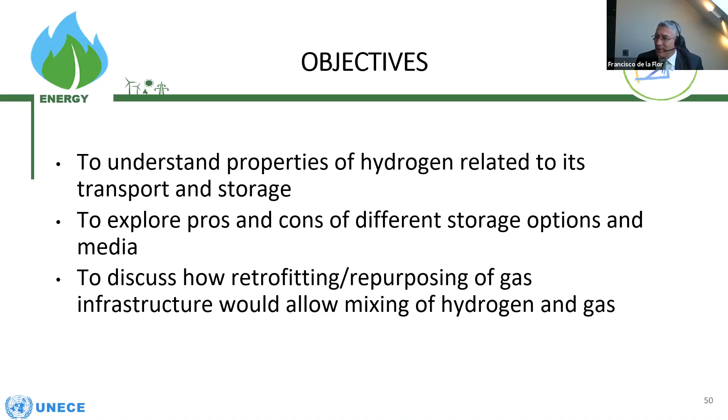I cannot resist saying, regarding one of the statements made by the Deputy Executive Secretary in his opening, that hydrogen shouldn't be seen as a liability. It's not hazardous material, but it's an asset. And UNECE has vast experience in setting regulations, norms and standards needed to contain and transport gases such as hydrogen. So we should take advantage of that and build on what we already have.

About the speakers today, we have five speakers who will talk us through the challenges and opportunities I mentioned, and they were in the previous slides: blending, storage, pipeline, retrofitting, and so on. I will quickly refer to the speakers before we go one by one. I will introduce all of them in this address.

First one is Abel Enriquez, EU Regulatory Affairs Manager at ENAGAS. He will share with us what is happening in the roundtable on transport of the European Clean Hydrogen Alliance. He is the Sherpa of one of the co-presidents of the roundtable, and as you know, usually the work is done by the Sherpas, so he's devoting dozens and hundreds of hours to this topic.

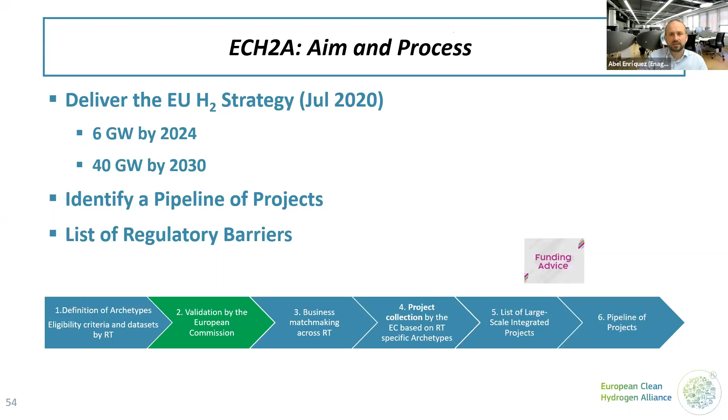Once the project collection exercise is finished, there will be a matchmaking session, a process to elaborate and develop the list of large-scale integrated projects. At the end, we will arrive at the pipeline of projects, the official list of the alliance. Before that, the Commission has promised to provide funding advice to those large-scale integrated projects, so they can get access to financing in the various programs which are open at the moment.

In the next slide, you will see that the alliance is structured around 6 roundtables: one on production, another on transmission and distribution, energy sector, industrial applications, mobility, and residential use.

The one I'm going to talk about today is transmission and distribution, linked to the topic of this workshop. This roundtable is facilitated by ENTSOG, who provide the secretary role, and is co-chaired by 3 companies leading this transmission and distribution roundtable, together with around 40 companies which are part of that roundtable.

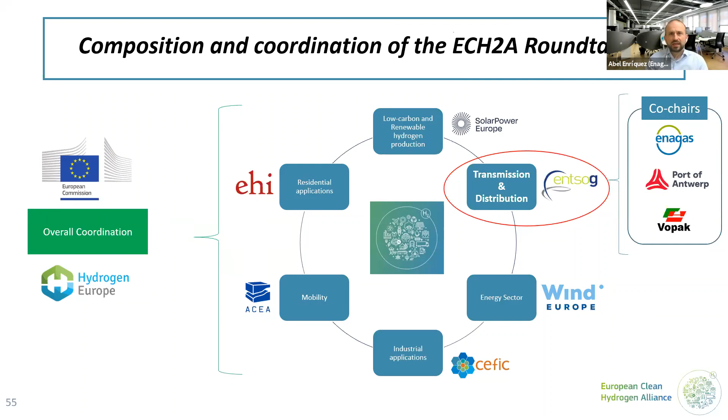In the next slide, you will see that the transmission and distribution roundtable has agreed on a number of categories or archetypes in front of you. Due to time limitation, I will not go into detail, but there will be an archetype for transmission and distribution pipelines, another for marine storage and handling terminals, a third related to shipping, which is also a way to transport hydrogen, and a fourth archetype about inland distribution by truck loading, rail, barges, or other technologies and logistic options. The transport technologies are written in the lower part of the slide.

The roundtable is really open and inclusive, and we are not limiting ourselves to liquefied or pressurized hydrogen, but also planning to study and assess projects dealing with ammonia and other hydrogen carriers like liquid organic hydrogen carriers, methanol, methane, etc. So a number of technologies are part of this roundtable, and they can qualify to become part of the official pipeline of projects.

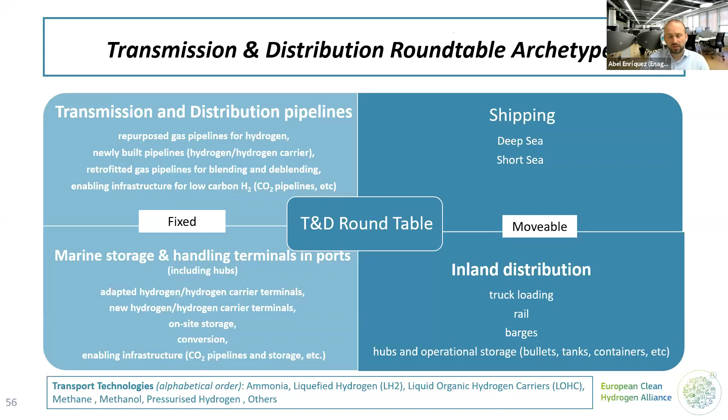In the next slide, the last one, I'm presenting the vision. On the 10th of March, the CEOs of 40 companies which are part of this roundtable agreed on 5 key principles which constitute the common view, the common understanding of the roundtable. This is about the role of hydrogen and hydrogen infrastructure, and their role in the future energy transition process, and also delivering the EU energy and climate targets.

The first principle is about the role of hydrogen as an enabler, being at the heart of the energy system, a paramount element for sector integration, integrating electricity and gas infrastructure, and making the whole energy system more sustainable, reliable, cost-efficient, and flexible.

This is fully coherent with the strategy of the European Commission and the views of the European Union. The second principle is about the role of hydrogen transportation, distribution, and storage, which will be based on multiple transport modes and multiple transport technologies. Third, there is common understanding that hydrogen transport, distribution, and storage infrastructure necessary to handle renewable and low carbon hydrogen will contribute to achieving the objectives of the European Commission hydrogen strategy and the EU Green Deal. It's important to understand there are different ways of transporting, distributing, and storing hydrogen, and all of them are part of the roundtable.

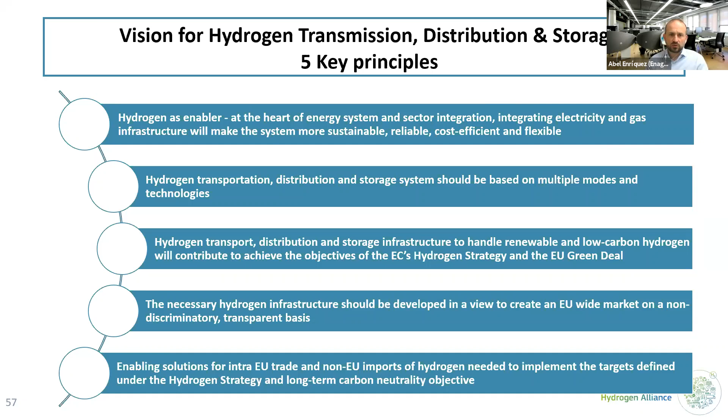And with this, I'm finishing my time. Thank you very much for your time and attention. This alliance is also fully in line with your carbon neutrality project in UNECE, so they can go hand in hand in delivering the energy transition. Thank you very much.

Thanks, Abel. Let me say something here—I would like to avoid being too European Union centric. The ECE region covers the Northern Hemisphere, 56 countries, and we could give the impression we are focusing here on the European Union. In the previous session, we had Konstantin and Tatiana, where the main focus was on the eastern part of the region. So please apologize if this seems too European Union centric. Anyhow, as Abel was saying, this is a global topic, so even the external dimension is being covered.

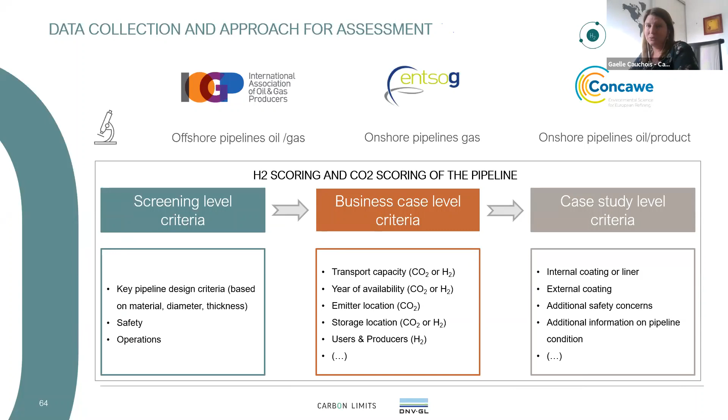Then, as we identified sources and sinks, both for hydrogen and CO2, we will calculate a business potential and will perform a more detailed assessment for the case studies. Next slide, please. So to identify locations of sources and sinks, we mapped the current location of, for instance, wind and solar farms that could become hydrogen producers in the future, and did the same for each potential consumer, so from cities to train stations to iron and steel plants and producers as well, so also ports for imports.

And we did the same with CO2 sources and sinks. We then transferred the estimation of others, not ours, per sector onto our point data based on various activity data, and managed to build a grid of high probability production and consumption for sources and sinks. And that is where we are as of today.

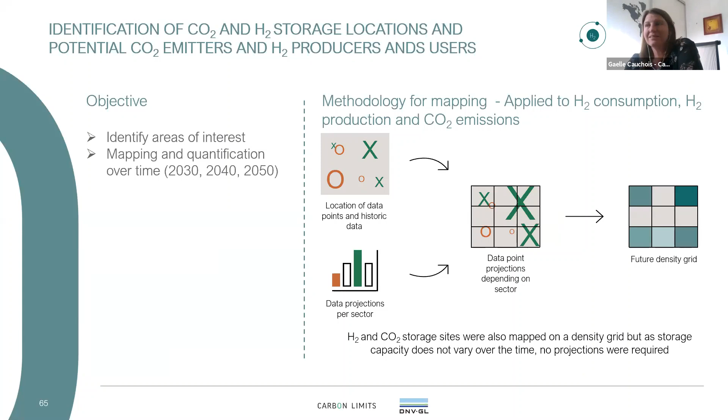Next slide, please. As we are in the process of selecting case studies for the economic assessment, for now we do not know yet the outcome, as it's still ongoing, and it should be finalized in June 2021. But those kind of fact-based exploratory studies done at EU level for now could be beneficial to all UNECE countries. Thank you for your attention.

Thanks, Gaelle. This brings to mind one comment. Tatiana Mitrova was referring to practical projects, and let's go to practical projects. In terms of transportation, one of the most practical things we can do is just to assess what we already have underground, the pipes we have underground, because this would be a very quick start in the development of hydrogen. So thanks, Gael. This is a very interesting project, and let's hope that our colleagues provide the data to get the most complete picture possible, for the benefit of all of us. So thanks, Gael. Let's wait for the questions at the end, because I presume that this specific project may resolve some questions.

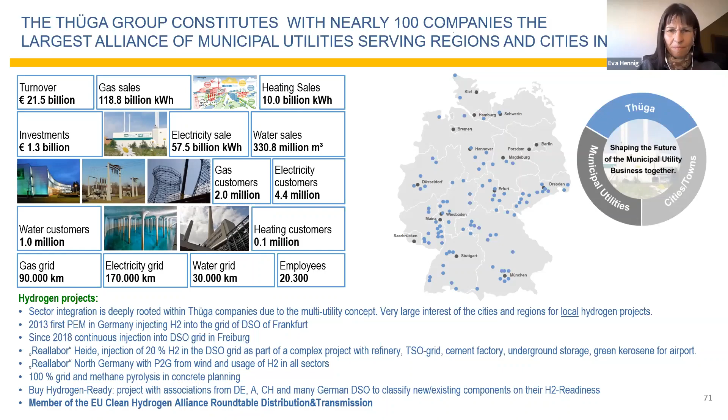Next slide, please. What I would like to tell you is we have a parallel system in most of the countries. So we have the TSO level and we have the DSO level. In Germany, we will have at the TSO level probably mostly pure hydrogen grids parallel to the methane grids. And the very large customers are connected to the TSOs. And of course, the underground storage is connected to the TSOs.

At the DSO level, and maybe this is the specificity of Germany, 99% of the industrial consumers are connected to the distribution grids.

More than 70% of the consumption of the industrial consumers and nearly all of the CHP plants are connected to the distribution grid. This is probably also one of the reasons we have very large regional distribution grids operating high pressure pipes. So what we see at the moment is that we are planning a blend of hydrogen into the distribution grid, but we are also looking at pure hydrogen grids as soon as we have the backbone, the famous European backbone, also in Germany, coming from the TSOs. So we could inject pure hydrogen also to special customers.

What we are looking at are the CHP plants, for example. You all might know the taxonomy in Europe - it's very strict. So the CHP sector is one of the first that has to decarbonize. But we also have very large industrial consumers who have interest in pure hydrogen. So we will have a stage-like approach coming in the next few years. Blending, of course, is the first very important step because we see this as the fastest and also as the most cost-efficient step.

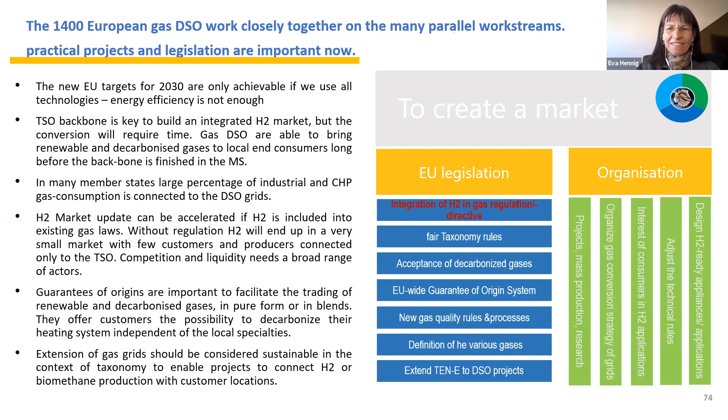Here I dare to have a comment. We achieve, in some cases more than in others, an integrated gas market in the EU. Not in all places at the same level, but now we have another gas in the grid, either mixed or pure, which is hydrogen.

So it will be good to just continue with the aspiration of keeping this integrated gas market with a lot of injection points, and then using the network just to connect the production sites and the consumption sites.

And then, from my own view, I do believe that we already have some good regulatory framework, so it could be relatively easy to mirror that framework, and use it as inspiration or as a base, or just probably copy-paste with a small adaptation for hydrogen.

Because in between, as you say, hydrogen and natural gas will go together, as much as mixed within mixtures and blending.

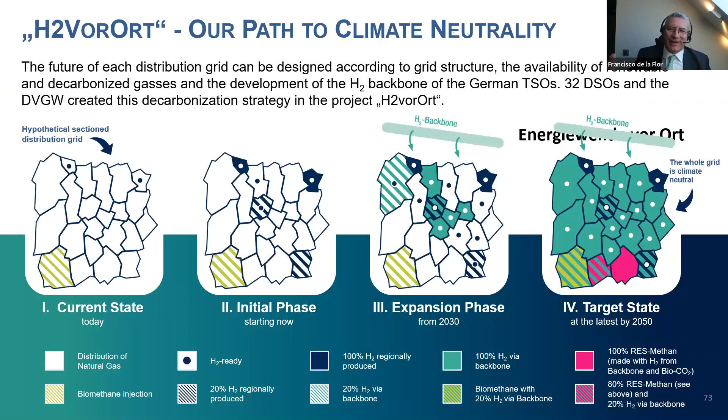Thanks, Thierry. Sorry if this is very Iberian-centric, but this is your project, your vision. Excuse me, what centric? Iberian-centric, Iberian Peninsula. No, it's not Iberian-centric—we're working right now on Italy and Tunisia, and yes, to work on Turkey. And to be in the Middle East.

But you need to talk about where the resource is. It's like growing bananas—if you want to grow bananas in France or Russia, you're not going to be very successful. The same thing goes for hydrogen. You need to go where the resource is, and the resource is very cheap electricity, which comes from solar. So in the end, it's going to be from the south. That's the fact of life.

Fits perfectly with today's workshop and tomorrow's session of the group of expert guests. So last, but certainly not least, is Siegfried Kiss.

Floor is yours. Happy to see you again, Siegfried. Francisco, can you hear me? Perfectly. Again, many thanks for the opportunity to share some slides concerning storage of hydrogen.

It is a great pleasure and honor for me to be part of this workshop. RAG Austria is a small company with about 200 people, but we have a major impact in Austria and Central Europe because we operate underground gas storages, UGS in short, with a volume of about 70 terawatt hours and 30 gigawatts of withdrawal capacity. We are very innovative concerning large-scale hydrogen storage. So let me show the first slide.

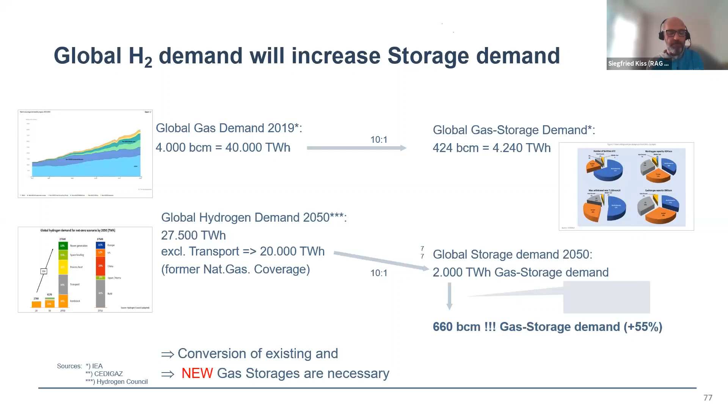Next slide, please. Two main needs drive this demand. First, it's the need of hydrogen exports and imports to balance the demand and supply. Here, as an example for Europe, RAG is involved in the project for importing hydrogen from Ukraine, and this means a significant increase of storage capacities for hydrogen in Central Europe. And the second need is for interseasonal energy storage.

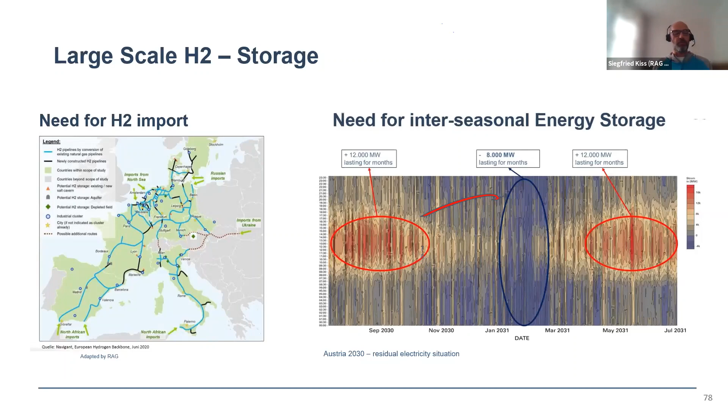For example, and here in Austria, and this is valid in many countries, with the data for a policy scenario of 100% renewable electricity production in 2030. During summer period, excessive electricity production has to be transferred to a long period demand in winter days. Hydrogen as an energy carrier is the only way to balance the energy system and provide security of supply 24/7, 365 days. To store hydrogen on a large scale is not an easy task. So therefore, RAG started, and please the next slide.

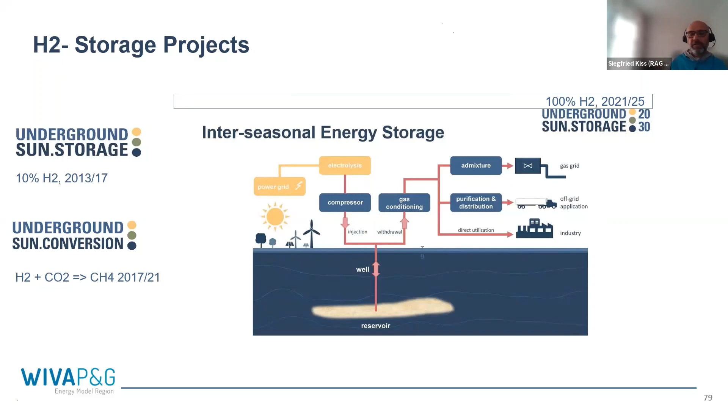We already started in 2013 with a research project called Underground Sun Storage. The first in the world, we injected 10% hydrogen admixture in a sandstone reservoir and investigated the integrity of the whole storage system. In a follow-up project, Underground Sun Conversion, we investigated the conversion of hydrogen plus CO2 in a reservoir because it's converted into methane by the help of microbes called archaea. Our recent project is Underground Sun Storage 2030, where we investigate 100% hydrogen content for storage. I think in a very short presentation, I'm looking forward for questions, and I'm happy to answer if it is possible.

Thanks, Siegfried. Yes, I told that this was very innovative, and your ideas could be very inspiring for this forum. So thanks for making the time. I knew that you had a conflicting agenda, and you decided to cancel the other to compromise and be here. So thanks, Siegfried, for that. You're more than welcome.

Then we have some 20 minutes for the debate. We may start with what we have in the chat, but we have also some few questions. Also a question from your side, from the panelists, are welcome. One of them is from Bagdi Hosha from Medreg, asking about the role of national regulatory authorities on hydrogen. I think it's very interesting. I would like to start with this, to all of you, whoever wants to of the panelists to intervene. If not, I will do it myself. But please, you are here, Siegfried, you are on the screen, so yourself, you can start.